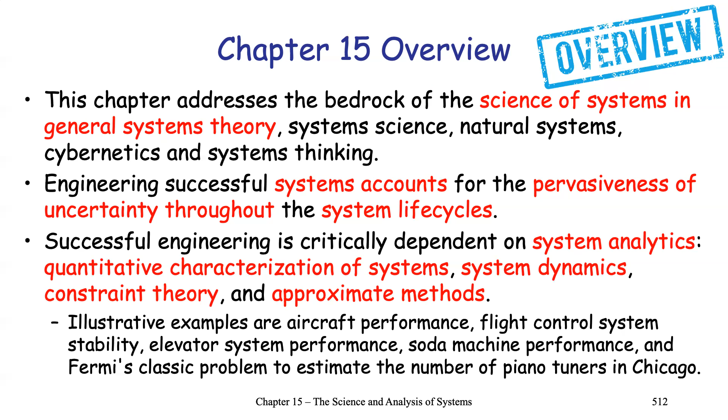Successful engineering is critically dependent on system analytics: quantitative characterizations of the system, system dynamics, constraint theory, and approximate methods. We'll show how that works as we go through the material in this chapter.

So in the textbook and what we have here for this lecture, here is the outline: general systems theory, system science, natural systems, cybernetics, system thinking, quantitative characterizations of systems, system dynamics, constraint theory, and guesstimation.

Since this chapter contains very complex information, we'll provide a summary overview first and then survey the details. This is taking the information in the textbook's summary section, and we'll start with that. This will give context at a higher level for a bunch of charts in this chapter, and we'll only drill down into a few of those things.

System theory is applicable to human-designed, engineered, biological, and social systems. This is starting to have an emergence in areas like system biology.

The realization, operation, and support of systems necessitates a system approach, integrating various disciplines, with scientific generalists performing the system function, integrating the parts into the whole greater than the sum. That's an important reminder: the whole is greater than the sum.

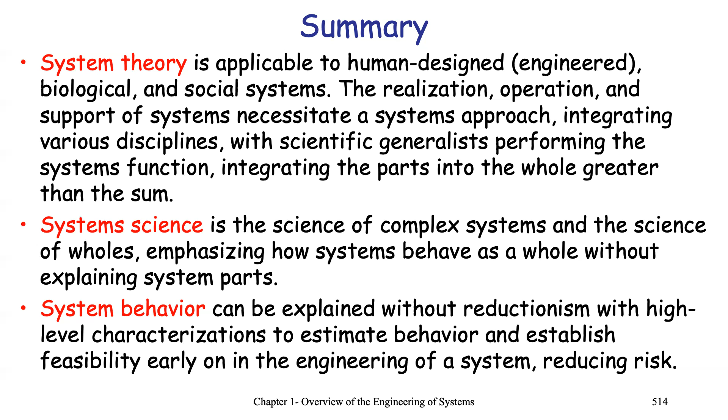System science is a science of complex systems, the science of the wholes, emphasizing how systems behave as a whole without explaining system parts. So you have a lot of things that could be black boxes, and you're hooking them together and then explaining that. System behavior can be explained without reductionism, using high-level characterizations to estimate behavior and establish feasibility early on in engineering systems, reducing risk.

Natural systems constitute living and non-living systems found in nature. Structures found in nature can be reverse-engineered and applied to the engineering designs of systems, and there's a lot of interesting work being done in that area.

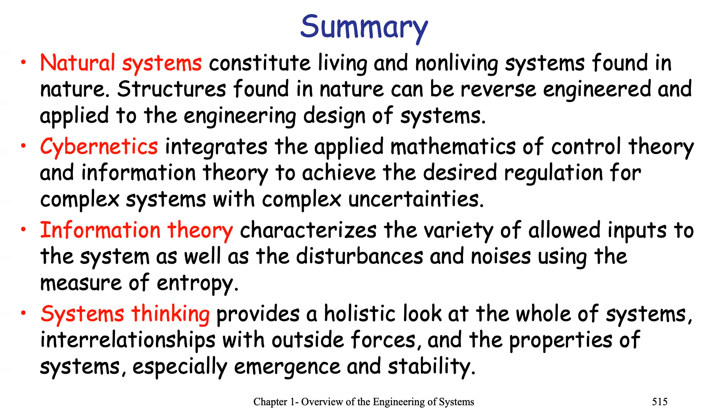Cybernetics integrates the applied mathematics of control theory and information theory to achieve desired regulation for complex systems with complex uncertainties. Having proper control and flow of information is vital for a system. Information theory characterizes the variety of allowed inputs to the system, as well as disturbances and noises, using the measure of entropy. System thinking provides a holistic look at the whole of the system, its interrelationships with outside forces, and its properties, especially emergence and stability.

Quantitative characterization of a system is done by examining complex systems operating in a context of uncertainty. The treatment can be simplified to emphasize key concepts, using approximate models to assess feasibility and meet performance requirements.

System dynamics is a stock-flow feedback structure modeling of the system in operation. The key is that answers and solutions to observed phenomena may be non-intuitive without analysis, so analysis can be critical.

Constraint theory determines the well-posedness of a set of often disparate, interrelated, multidimensional models, often from different organizations within the enterprise, to describe the systems. There's going to be a variety of constraints, and the system engineering team needs to make sense of all that. Models are based on physics, objectives, behavior, preferences, and costs.

Constraint theory determines the internal consistency of a system's integrated mathematical model, and whether requests for information out of the model are allowable.

Guesstimation is an approach to make good approximate estimates with little or no data. An unknown dependent variable is determined within an order of magnitude by structuring the solution as a product of its independent variables and making assumptions about their values. Making good approximate estimates with little to no data and little time is a critical engineering skill, and is of value as a sanity check of more detailed models and data.

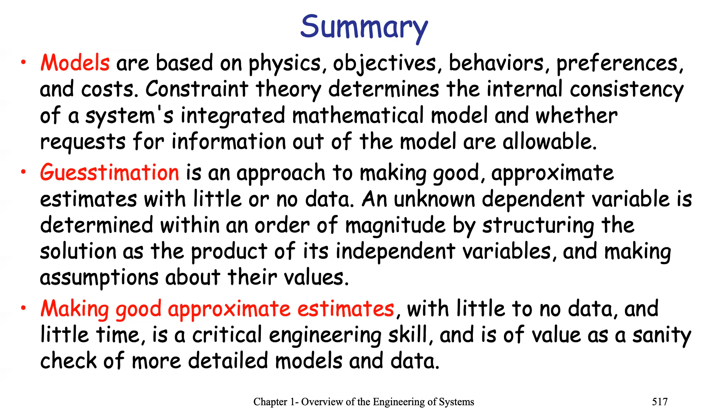Just to reflect back, this is the outline we're covering in these topics. We had a summary of these things first, and now we're going to start to get into the details. Some charts will go into more specifics, and others will just keep it at a high level.

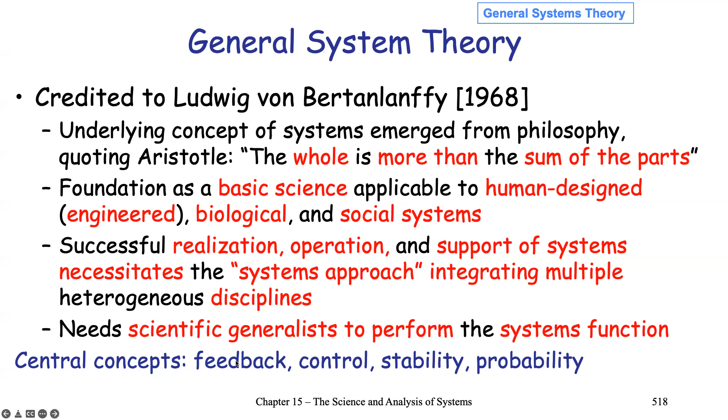For general system theory, this is where we get the idea that the whole is more than the sum of the parts. Its foundation as a basic science is applicable to human design engineered, biological, and social systems. It provides successful realization, operation, and support of systems, necessitating the system approach integrating multiple heterogeneous disciplines. It needs scientific generalists to perform the system functions, and the central concepts are feedback, control, stability, and probability.

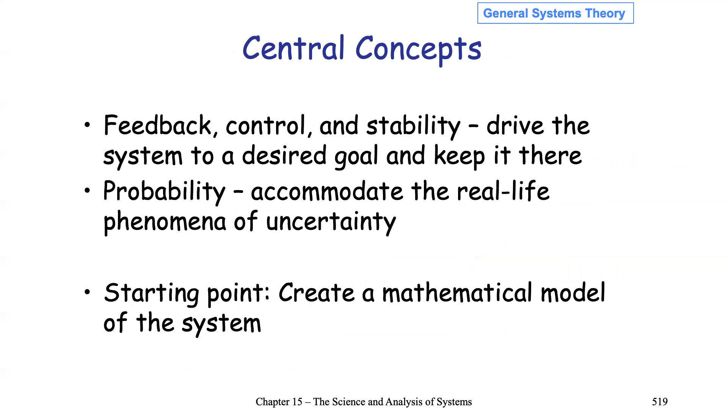Feedback, control, and stability drive the system to a desired goal and keep it there. Probability accommodates real-life phenomena of uncertainty. The starting point is to create a mathematical model of the system, which is needed if we're going to do the analysis and have a mathematical model that we can manipulate.

We have a couple of charts here that start to develop the mathematics. I'm not going to go over this in a lot of detail, but you can have sets of simultaneous, perhaps nonlinear, perhaps partial differential equations. So you're going to have a bunch of equations, and the applications can be found in engineering, biological, and social systems. There are references in the textbook you can look up if you like.

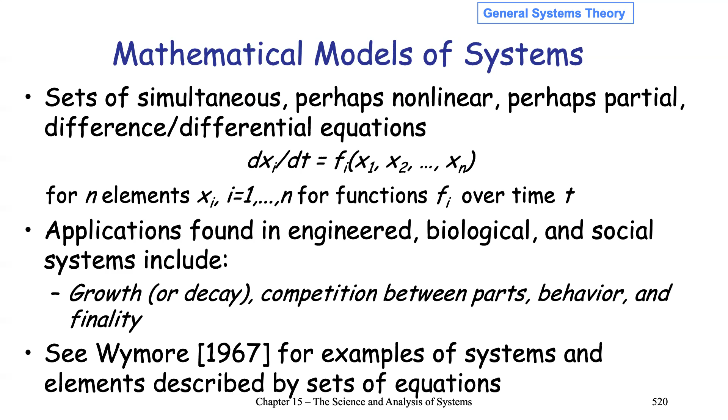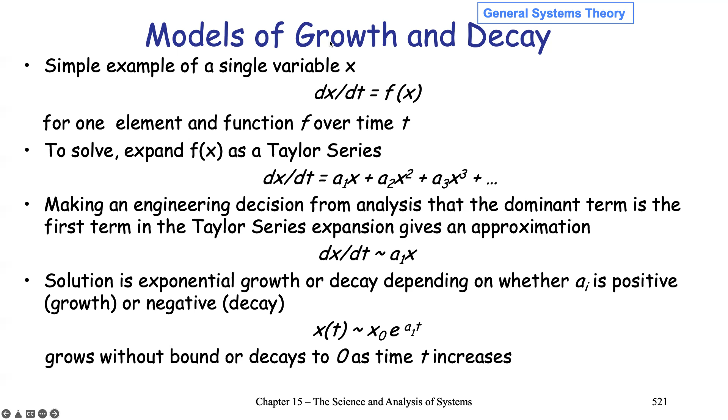We can make a number of different types of approximations if we're just trying to get the major trends for growth or decay. You can also use logistic curves for doing this, and you can look that up in the textbook to get some more insight. You can have competition in terms of possible solutions, and you can play one against another, so that's something that can be done.

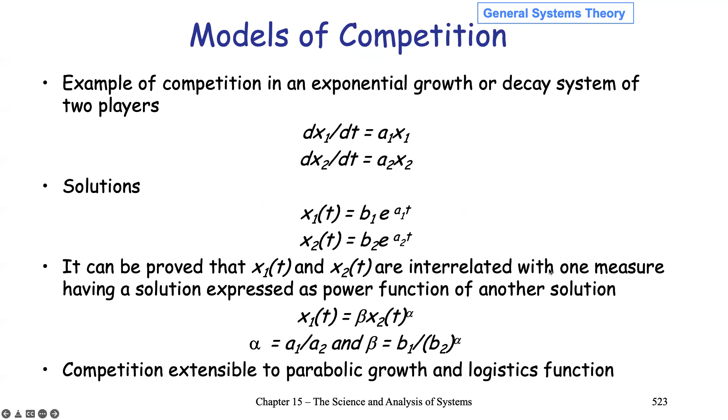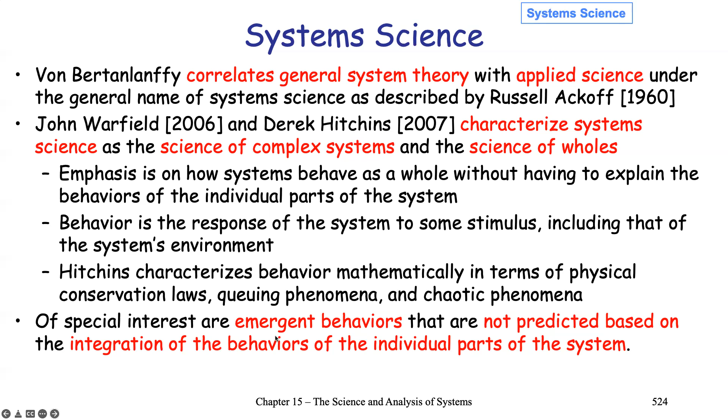When you stick things together and you have a closed system, feedback, control, and stuff like that, there are things that start to interact with one another. That's what we're trying to describe here when we use the term emergent in this context.

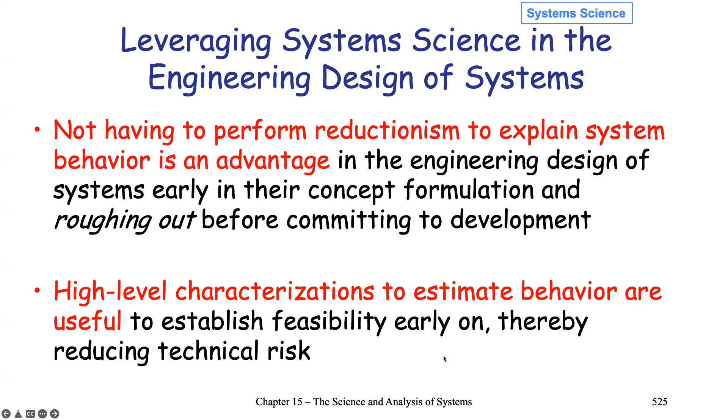Leveraging system science in the engineering design of systems, not having to perform reductionism to explain system behavior is an advantage, and that's what we want to be leveraging. In the engineering design of systems, early in their concept formulation and roughing out before committing to development, a high-level characterization is used to estimate behavior and establish feasibility early on, thereby reducing technical risk.

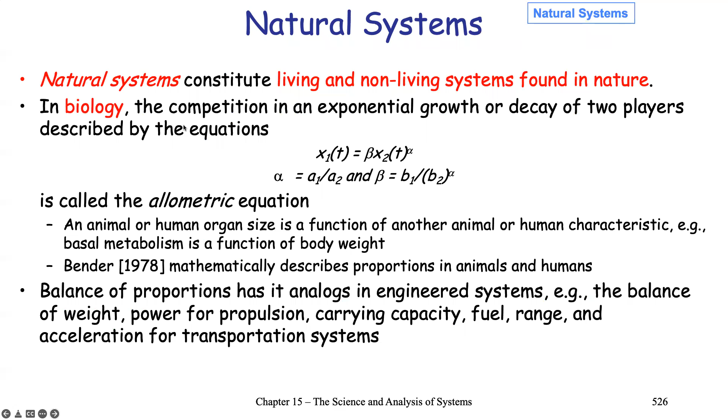For natural systems, these can consist of living and non-living systems found in nature. So in biology, the competition in an exponential growth or decay of two players can be described by equations. This is another area where we can start looking at, say, competition, which provides a better way of viewing the details we're trying to cover.

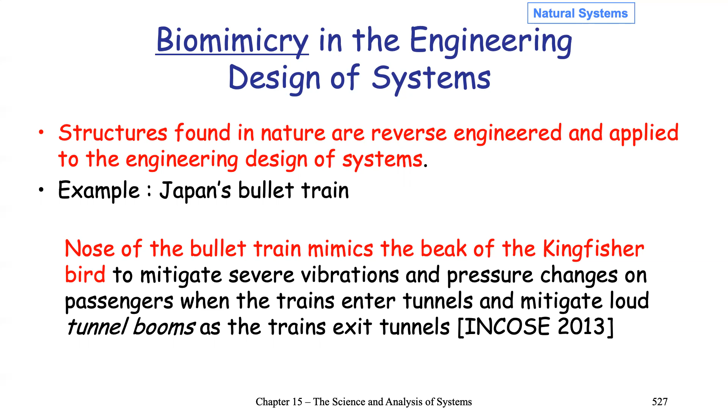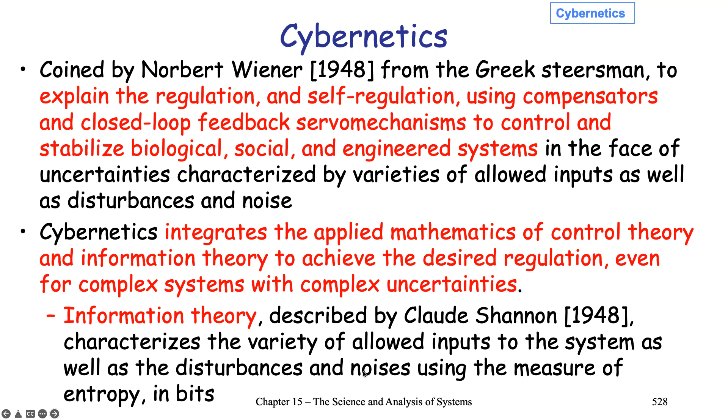Then we have information theory as well, that characterizes a variety of allowed inputs to the system, as well as the disturbances and noises using the measures of entropy in bits.

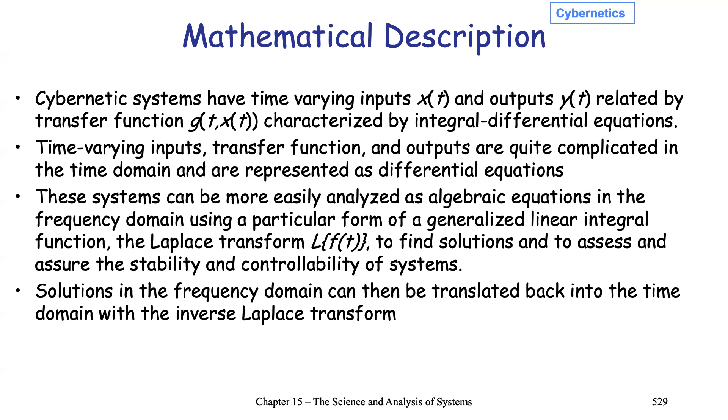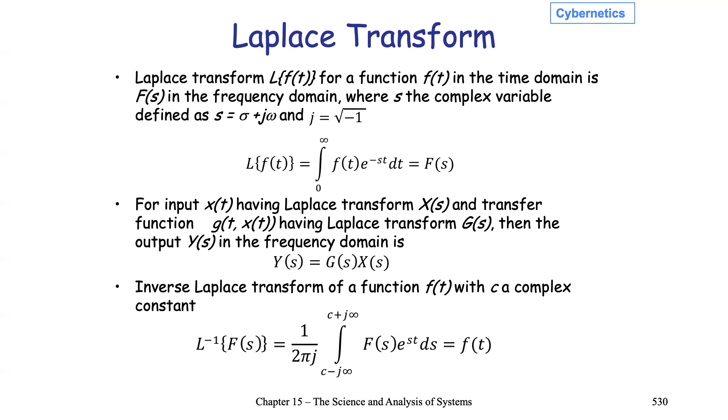This is just more details on the Laplace transform. This is in the textbook. I'm not going to go over this, but basically you can go from either a temporal domain or back and forth to another domain, whether it be in the spectral domain or something like that. So we're showing how that would work here with the Laplace transform.

There can be closed loop system stability and regulation. This is some of the details we're not going to go into as much due to time, but we have closed loop theory.

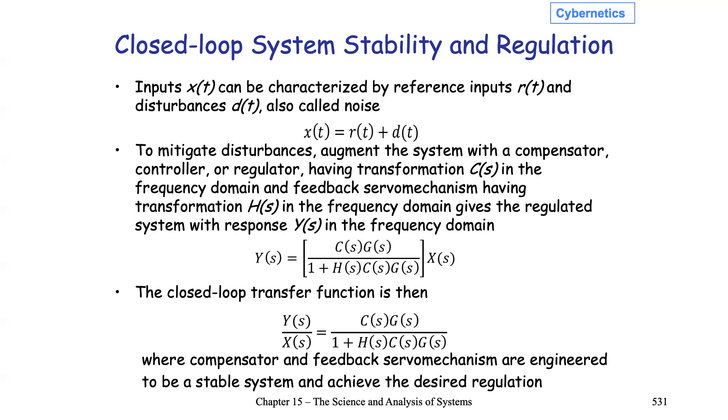So we're getting into controls, and we're also talking about stability and regulation, how to make things perform well, how to make sure that things stay stable, and have a control, a closed loop control, so we can maintain an operating point that we would like to be at.

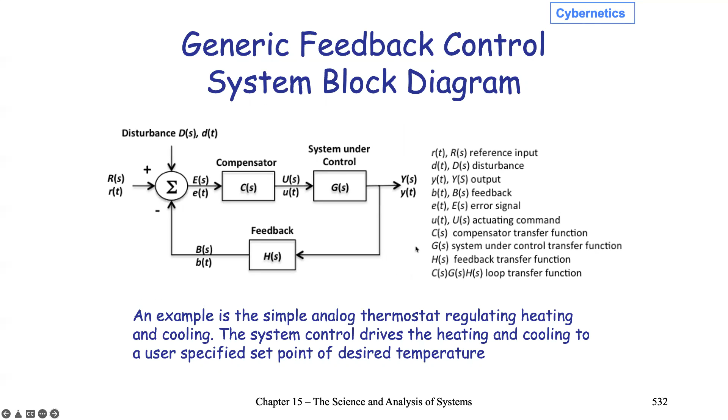So here's a generic feedback control system block diagram. You have a compensator, the system under control, and you have this feedback that it's looped back in. This is the basic concept for a first order control system.

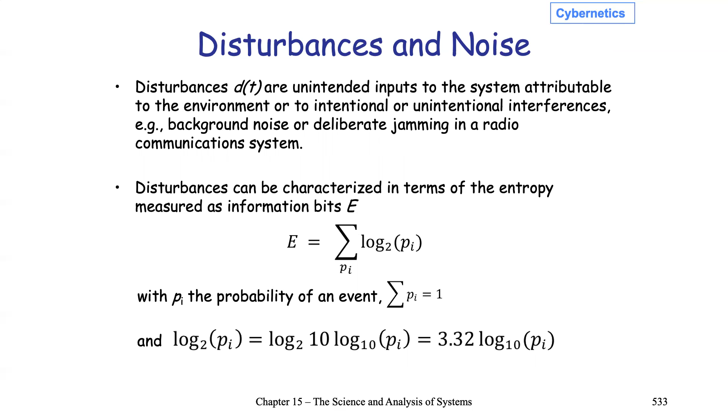Disturbances and noise, this is something that can happen if you're thinking of a communication system or a control system, but you're focusing on different frequency domains. That's something that also has to be put into part of the analysis as you're trying to characterize a system with your models, trying to have it as closely replicate what would actually be a real system.

You can have compensation for disturbances. So things that you can do, you know these disturbances are there, so you can compensate. You can have a number of different ways of doing that.

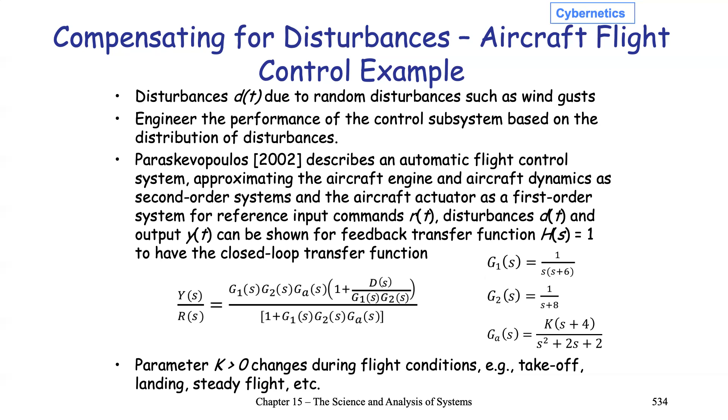And so when we get into the transfer functions for these things, they can get a little bit complicated. Here we're seeing some examples of some of these functions that are being played out. I'm not going to go into that much detail, but there's a lot of deep, rich body of knowledge in this area of engineering control systems.

So here is a flight control system block diagram. You can see that this is getting a lot more complicated. You have the engine, the actuator, and the aircraft, and you have disturbances being put into the channel. So we're seeing that.

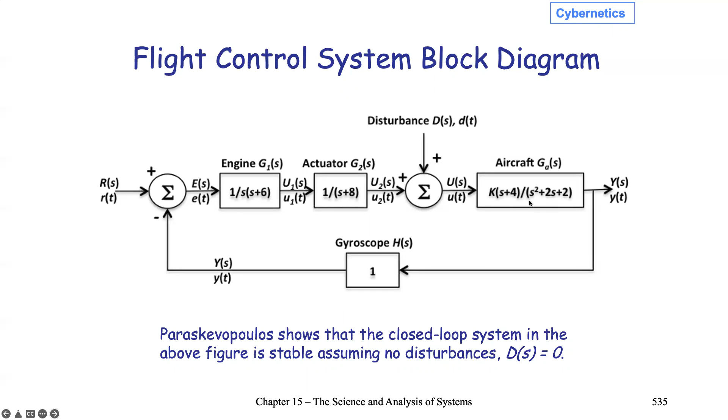And then there's a closed loop return that also gives some feedback. These are the equations for the model that's used for each one of these elements.

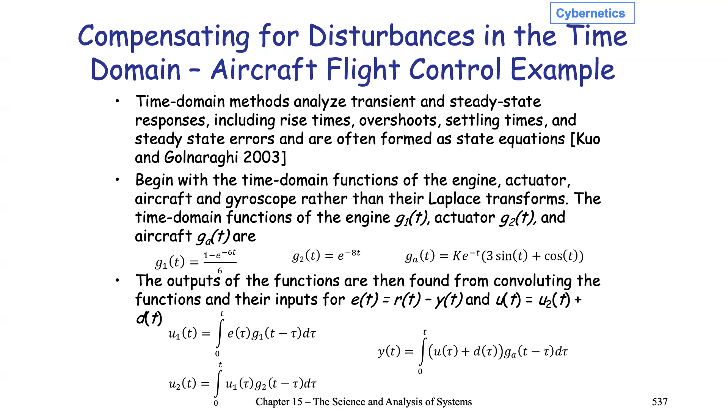So that's kind of a quick tour of what we were talking about, cybernetics and control. Now we're moving on to system thinking. We kind of make some abrupt changes to various topics, and that's one of the reasons why I wanted to start out with a summary and an outline.

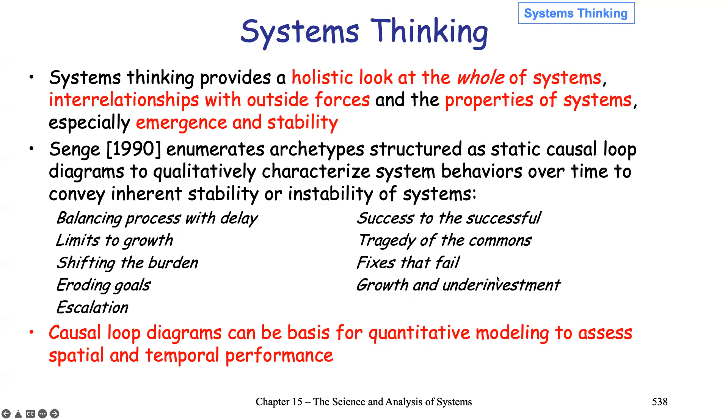So in terms of system thinking, the archetype of tragedy of the commons. This is something that is also developed in the textbook for another area in this system thinking ideology.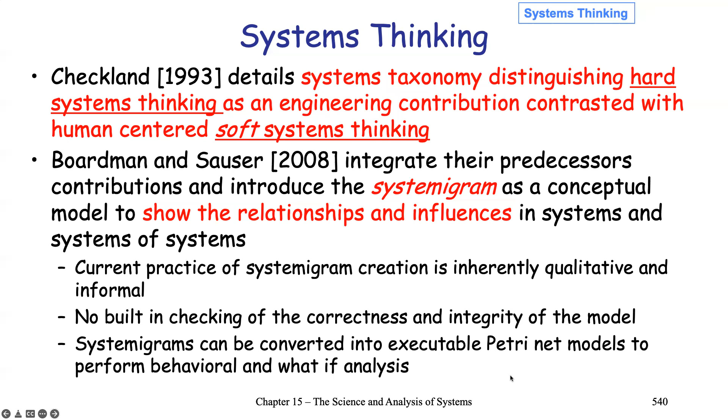So we can be thinking of something called systemigram as a conceptual model to show the relationships and influences in systems, and the systems of systems. There are some ways of thinking about that in SysML, but it also talks about Petri nets as another way to capture that.

Here's an example of a systemigram of the elevator control system. We can see the various things that are taking place. You have the entities of the elevator and the passengers, and then there's various ways how things engage through that with the other actors and activities that are going on as well.

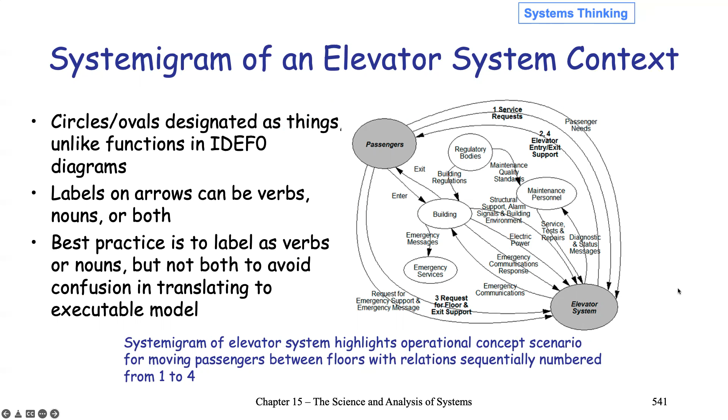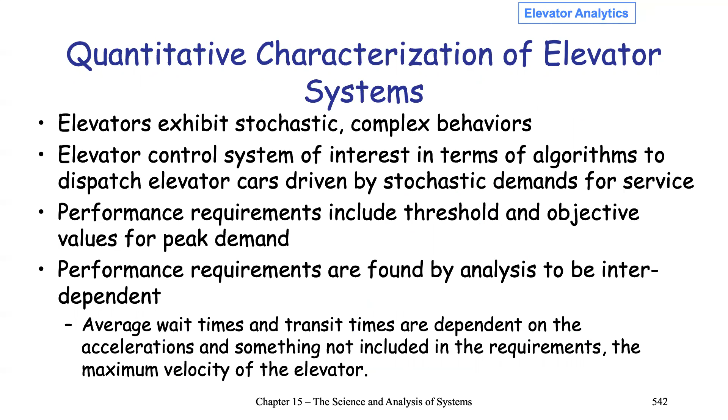For quantitative characterization of the elevator system, here's just some more details, and we've talked about the elevator system in a couple different ways. I'm just going to show this for a minute, but I'm not going to really go into this since I think we covered the elevator example pretty well.

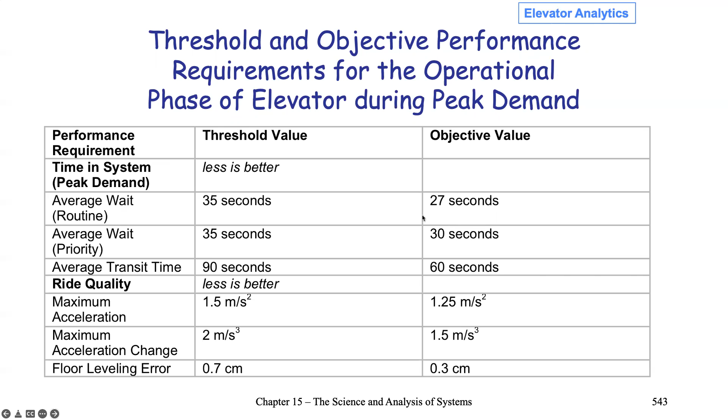Here is an example of threshold and objective performance requirements for the operational phase of an elevator during peak demands. We see these performance requirements and quality type of requirements laid out, where we have a threshold that these are the must maintain. An objective is we would like to have something a little bit better than that. So we're seeing two categories of requirements spelled out here.

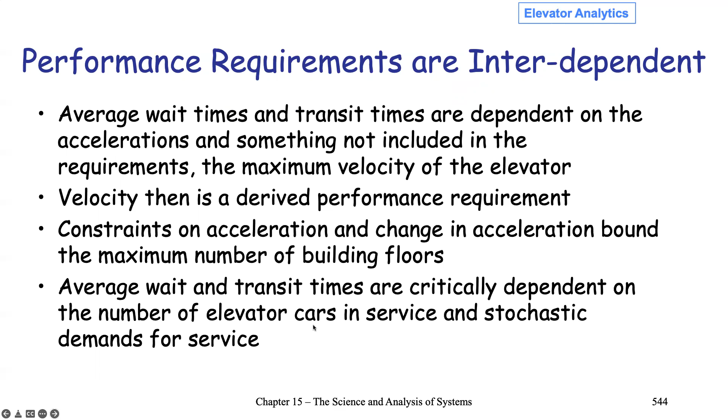For performance requirements, they are interdependent - one thing can be related to another in some form. So the average wait time and the transit times are dependent. Velocity is a derived performance requirement; constraints on acceleration and change in acceleration bound the maximum number of building floors. And the average wait and transit times are critically dependent on the number of elevator cars in service and stochastic demands for service. Just another thing to keep in mind.

Then for elevator analytics, even more, we have the external inputs, external outputs, and engineered values for the operational phase of the elevator. Here's just some more details of that design.

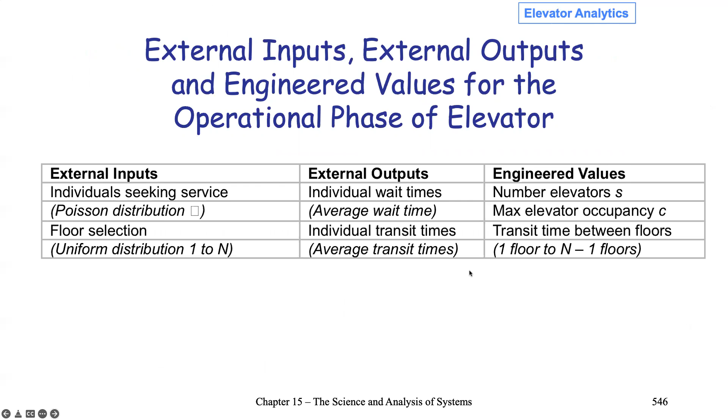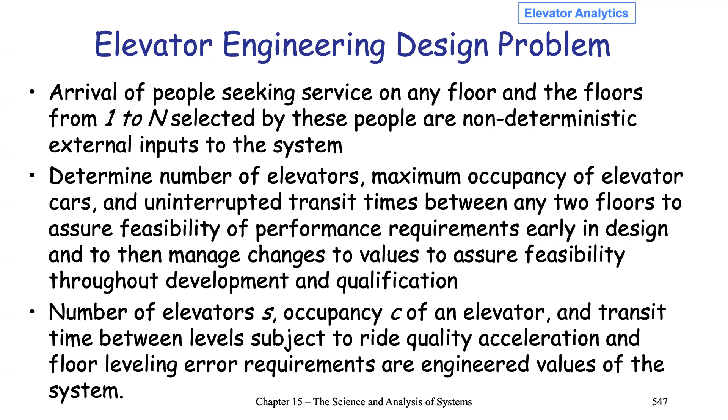The elevator engineering design problem. First, before you can solve a problem, you have to define what the problem is. This is one of those things that would come into that. And as we're doing this system thinking, we want to be capturing these types of points.

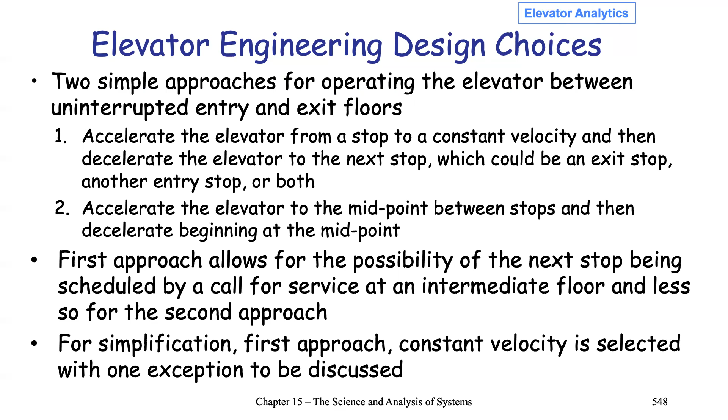The elevator engineering design choices. So you have a couple different approaches: accelerate the elevator from one stop to constant velocity, or accelerate the velocity to a midpoint between stops and then decelerate to begin at the midpoint. Maybe you've been in one or both of those types of designs.

We have some more details - we have the equations for the constant velocity approach, and some exceptions to the constant velocity approach. So we're still developing the elevator analytics.

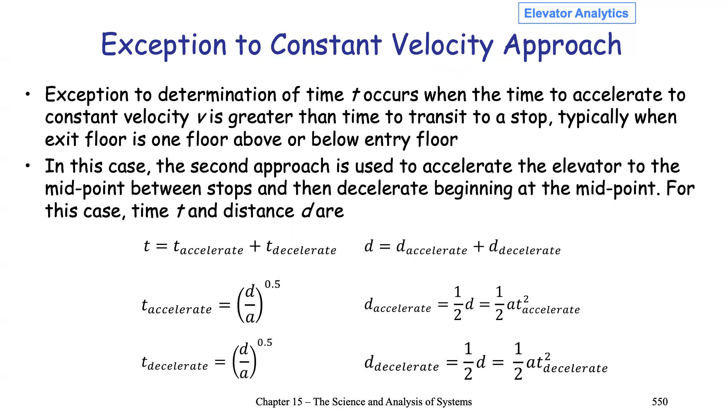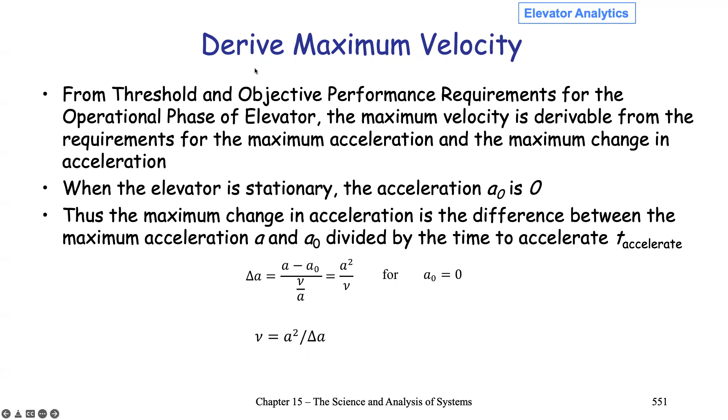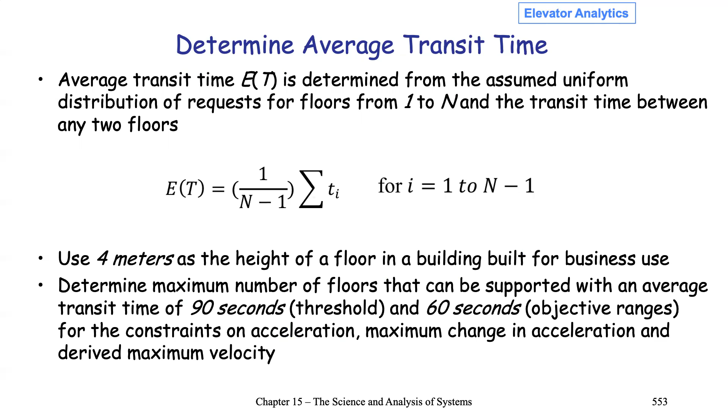This is going to be dependent on a variety of factors. So here we just start to develop that, and I'm not going to go through this in detail.

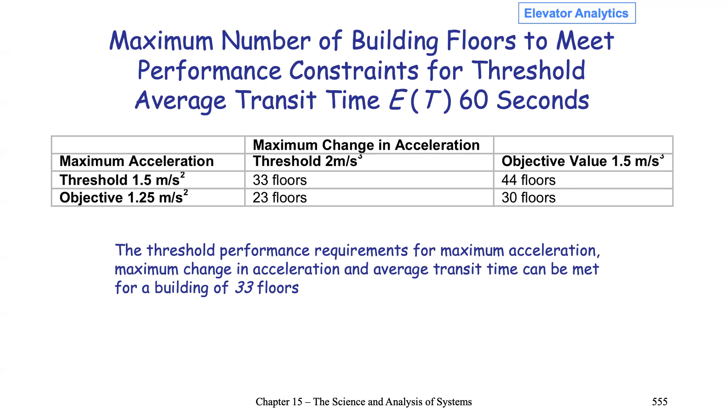And then we have a discussion here on elevator traffic analysis and sizing. This is focusing on an elevator, but having a traffic model to help determine the sizing is useful in just about whatever domain you're thinking about. Since I've focused periodically on satellites and CubeSats, if you needed complete coverage, just like having enough elevator coverage, you're going to need analysis to figure out the sizing. You may need a constellation of satellites rather than just one to accomplish the mission. For elevators, how many do you need in a building? It's going to depend on the number of floors, the predicted traffic, and various factors.

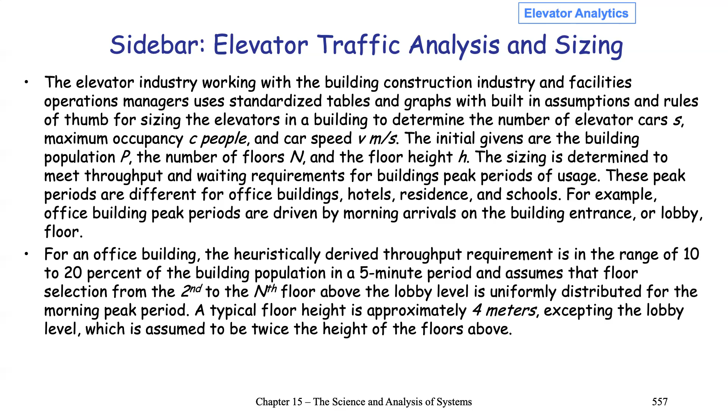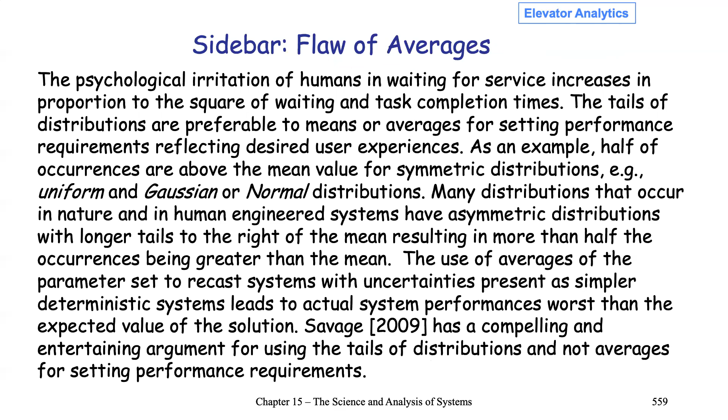So just some more details on the traffic analysis and sizing. And another discussion here, this is making sure that we use the analytic data properly. This is trying to talk about the flaw of averages. Averages, if used incorrectly, can cover up things that could really damage what you think would be an acceptable design.

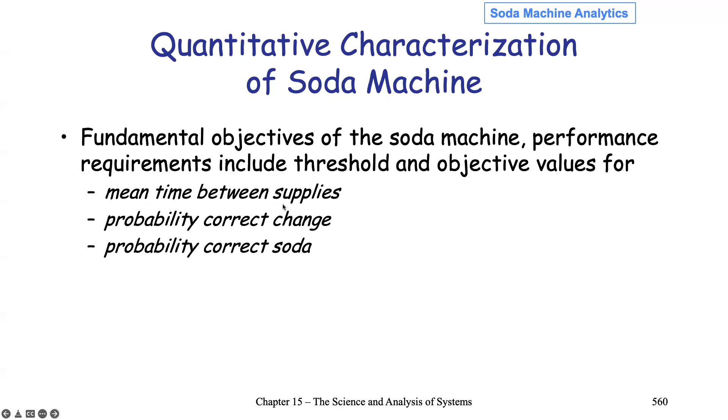For now, we talked about the elevator. We also have talked, not as much, about the soda machine analytics. Here we're mentioning quantitative characterizations of the soda machine. The fundamental objectives of the soda machine performance requirements include threshold and objectives. Some of the main things for a soda machine: the mean time between supplies, probability of getting the correct change, or probability of getting the correct soda. Those would be some key performance parameters. So we're seeing things similar to the elevator: threshold and objective values for performance requirements.

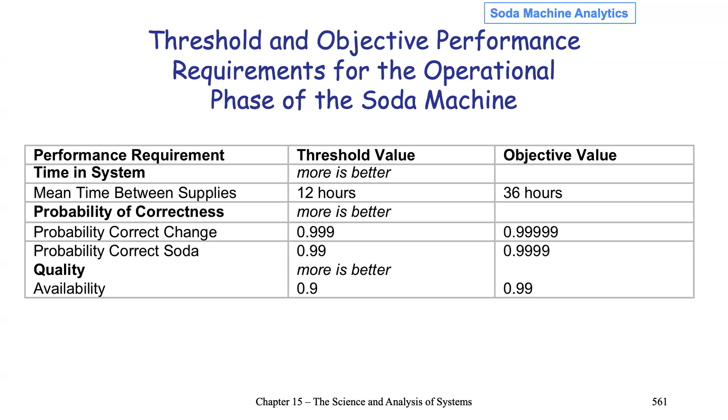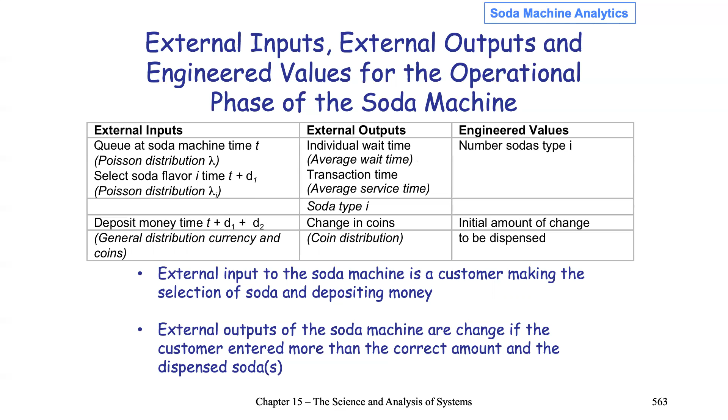We want to examine the stochastic properties of the soda machine, so we have this kind of development for this application. We have the external inputs, external outputs, and engineered values for the operational phase of the soda machine, as we showed in the elevator example. We have the engineering design problem, and we have the operational choices. There's a couple possible ways you could implement this, just like we had two choices for an elevator.

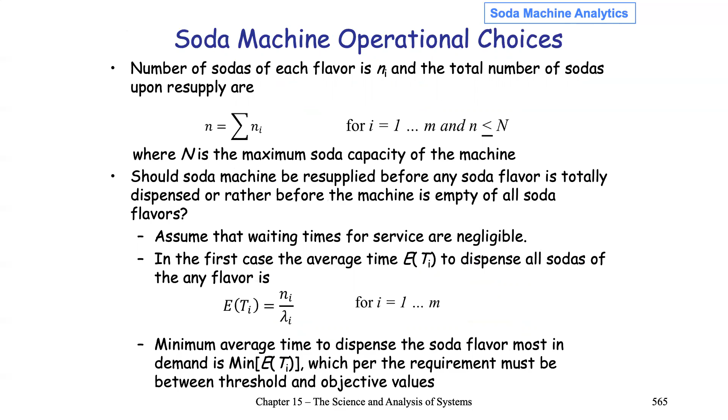Some more details on the operational choices.

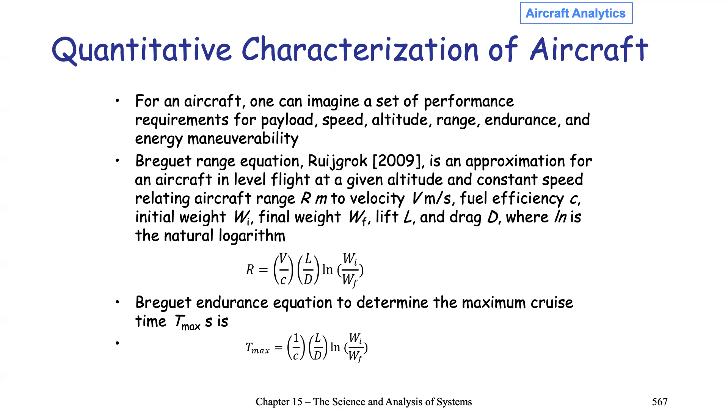Now we have the third one, the quantitative characterization of an aircraft. We talked about an F-22, as well as the payloads it might have. Here we're going through that same process for a third example. We can think about the aircraft engineering design problem: what is it you're trying to solve with this particular type of aircraft? You can think of range and endurance as key things an aircraft would have, as well as how long and at what velocity it would be able to go. If it's going to have a high velocity, chances are it won't have as much endurance, so there's going to be a trade.

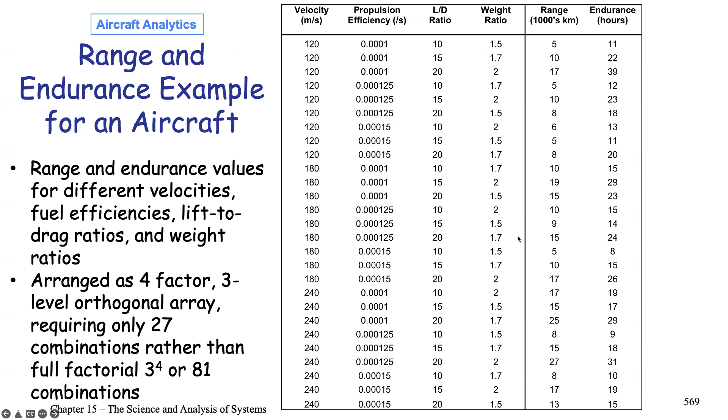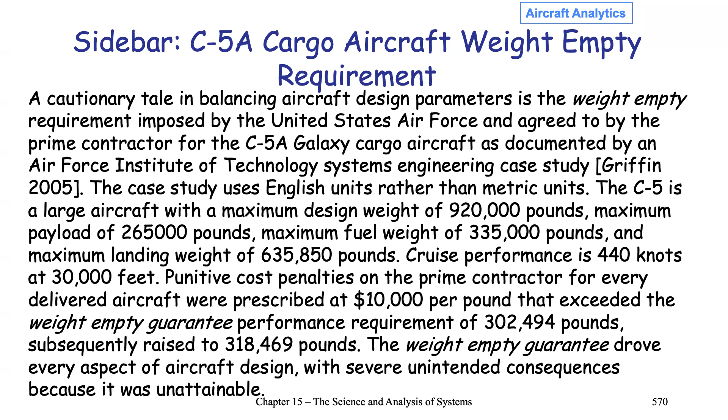For a cargo aircraft, now we're trying to see what it would be for a C5A cargo aircraft, looking at the weight for an empty aircraft, because the lighter it is, the more you're going to be able to have for storage, for a payload, or for things you're trying to transport from point A to point B. I'm not going to go into this in detail, there are a lot more points being made in this slide as well as in the text. Here's just some more details following on.

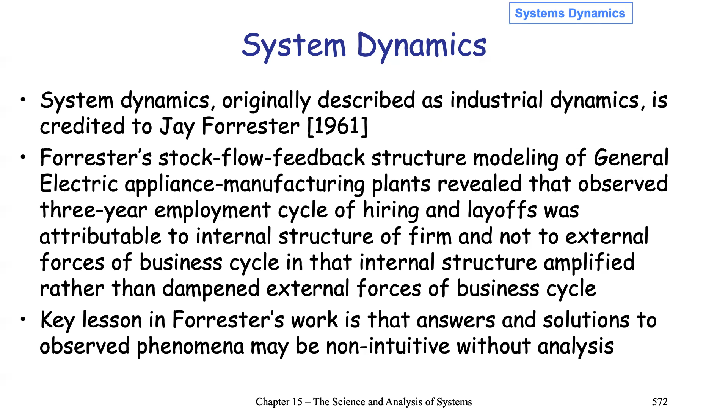Now, in terms of another topic, system dynamics: it deals with stock flow feedback structure modeling of various things, such as a General Electric appliance manufacturing plant. In that scenario, it revealed that the observed three-year employment cycle of hiring and layoffs was attributable to the internal structure of the firm, not to external forces of the business cycle. So just by analyzing the system, you're going to start to find metrics that might illustrate unintentional consequences you may need to adjust.

Going back to the soda machine, the system dynamics, you can actually come up with a model. Diagrams like this can actually be helpful for you to figure out and optimize what you're trying to do.

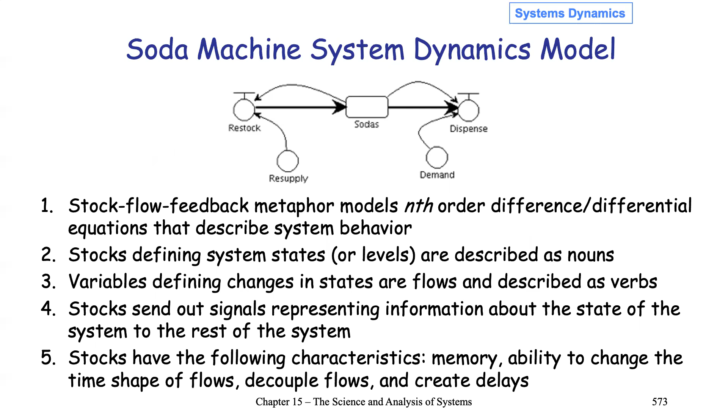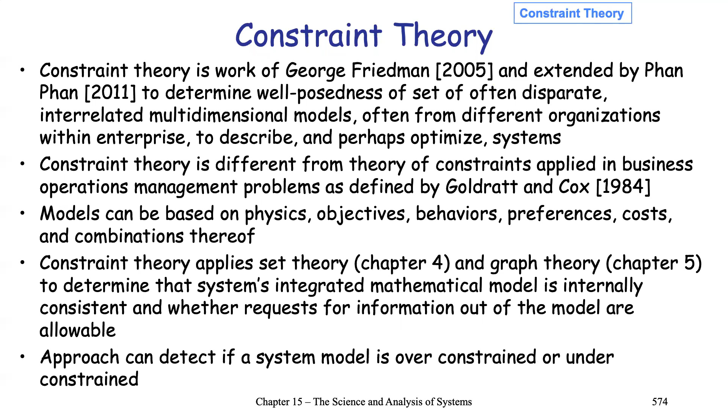For constraint theory, this is trying to determine the well-posedness of sets of often disparate, interrelated, multidimensional models. Do they all make sense? You have maybe some competing constraints, and you're trying to take those into account as you're completing your design process.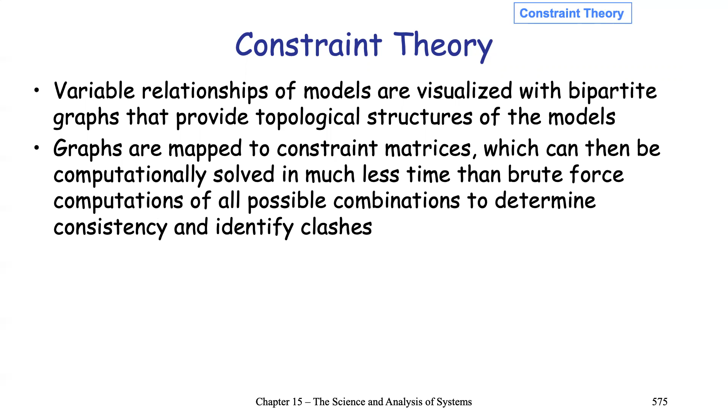The variable relationships of models are visualized with graphs that provide topological structures of the models. Graphs are mapped to constraint matrices, which can then be computationally solved. Those are some steps that take place in constraint theory.

Here are some examples of rules to determine consistency of mathematical models. I'm not going to read this, but here is a table from the textbook that gives some examples of things you can be thinking about.

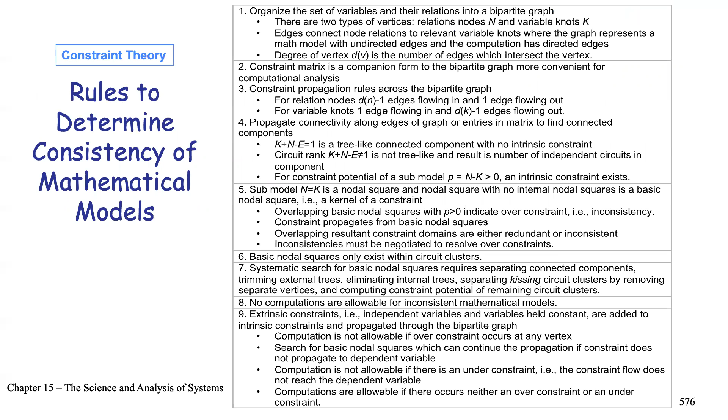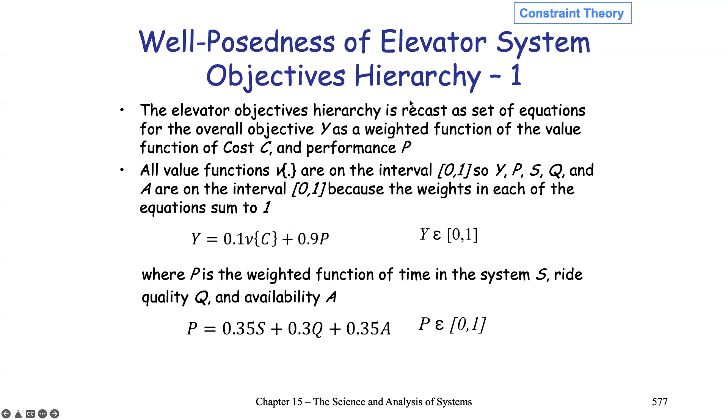For well-posedness of the elevator system, this is still in constraint theory. We can see how well we've laid out the objective hierarchy, and we've shown the hierarchy in a couple different forms throughout this course. This is just some more details of that, which I won't go through.

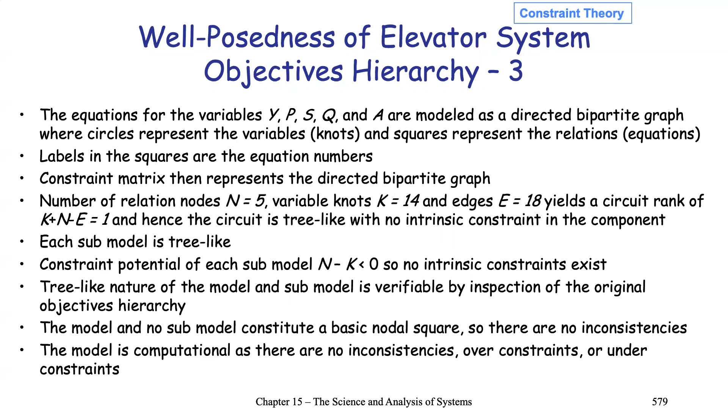And a third chart completing that look at the objective hierarchy, the discussion for the elevator system. Here is a directed graph of the elevator system objective hierarchy.

So now we're getting back to graph theory, and we're showing how this is very practical for what we're trying to accomplish. Notice that we have a couple different types of elements—there's circles and there's squares—and we talked about some examples of the types of diagrams. This is a bipartite, directed bipartite graph.

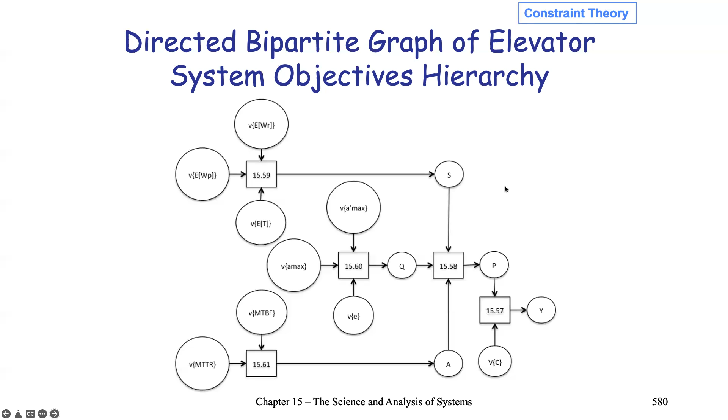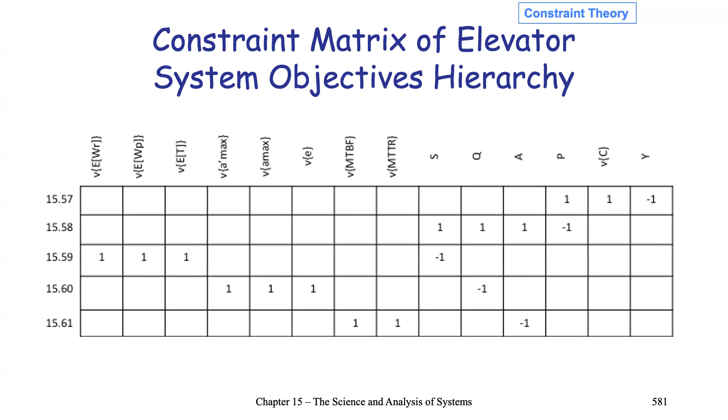We have some more complications that we're trying to capture. Here's an example of a constraint matrix for the system objectives hierarchy, and that's also something that may be of use.

We're getting close to finishing this lecture. I did go through some of that fairly quickly because I wanted to keep it at a high level and give you an overall survey. Since I did the summary at the beginning, I'm not going to do it at the end, but I'm going to focus on a few charts here to talk about some important topics.

First is this idea of guesstimation. Guesstimation is an approach to make good approximate estimates with little or no data, and that is an extremely important system engineering skill—important enough that I'm going to be talking about it as part of what I'll be addressing in the next handful of charts.

An unknown and perhaps unknowable dependent variable is determined to within an order of magnitude of its true value. You want to be coming up with some method for evaluation and estimation, so you can do it by similarity—if you think of system engineering and you have a lot of black boxes you're hooking together, you're trying to create some kind of way of having an estimate. This is what you're trying to do here.

The unknown quantity, the independent variable, is estimated by using, say, a geometric mean rather than an arithmetic mean. This would be an example of a basis of estimates that you're trying to leverage. If the individual estimates of the independent variables are unbiased, then the estimate tends to be within an order of magnitude of the true value as the number of independent variables increases.

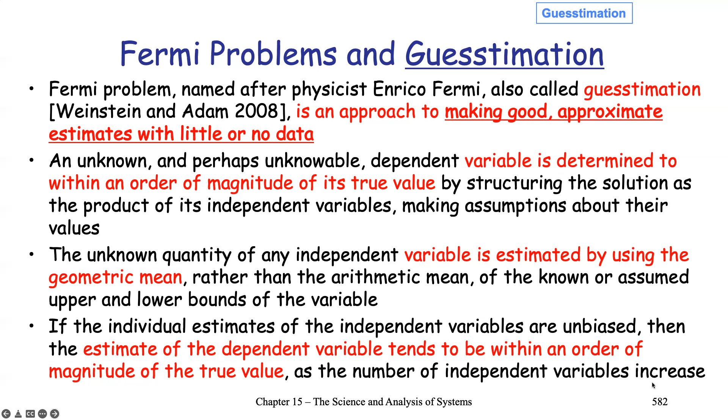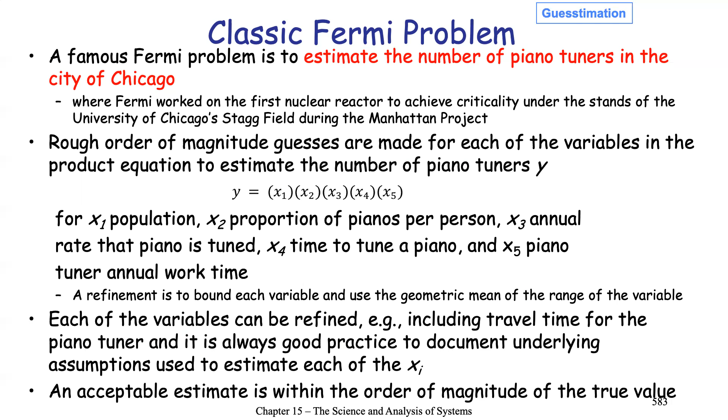A famous Fermi problem was to estimate the number of piano tuners in the city of Chicago—how could you actually go about doing that? You can think in terms of the population, the percent of the population that has a piano, the annual rate that a piano is tuned, the time to tune a piano, and the average time a piano tuner actually works in their employment in a year. You can start to put these things together, and that would be one way of coming up with a basis of estimate. That's the general strategy of what we're trying to talk about.